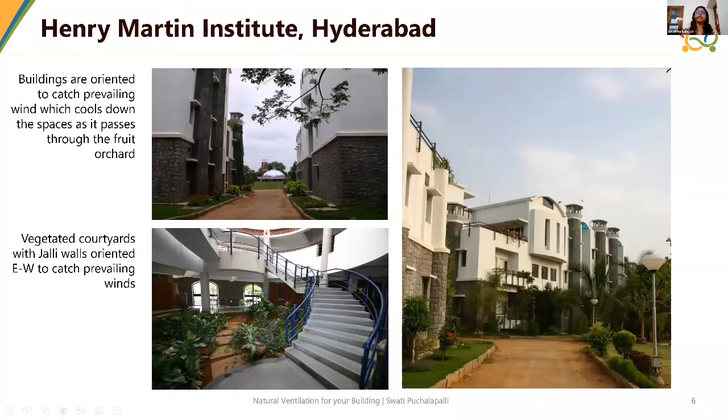They also mentioned that they had tried to integrate PDEC, or passive downdraft evaporative cooling system, but that wasn't really working well. They wished they had used more simulation to get the design right. They had a lot of design principles on natural ventilation integrated here, and integrated in such a way that the design works very effectively.

What you see on the right side are secure ventilators. Most often we think about natural ventilation only during occupied times, but they also made sure it was working at night, when everything was closed down, so the building was able to cool down at night. So this is a little bit about Henry Martin Institute.

It works extremely well. The most interesting aspect of this building is that it was designed around the same time as another very famous, well-known green building in the same location, Hyderabad. While that one cost 5,000 rupees a square foot to build, this cost 500 rupees a square foot. This worked completely on natural ventilation, whereas that did not as much. That other building also had a lot of imported materials, whereas this one was completely built with local materials and local artisans.

So there you go - there is an extremely good example of natural ventilation where it really works. If you get a chance, if you're in Hyderabad, I would recommend that you go and visit this place.

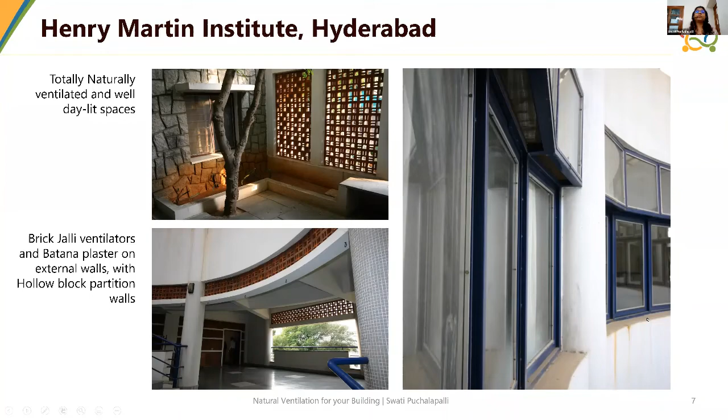Another case study I'd like to show is a rather unsuccessful case of natural ventilation. It was designed to be a naturally ventilated building, and we were brought on board about 4 years after it was built, because the children, since it was a school, were having a lot of heat stress. They found it extremely uncomfortable during summers when the school was operational, and it was also exam time, so they were not able to study effectively. So we went around looking at what was going wrong in this building.

As you can see, the windows seem to be adequately shaded. It seems to be a nice high thermal mass building, with the right kind of jalis and shading devices. So what went wrong and why wasn't it working? When we went and started analyzing it in detail - this was in Hyderabad again, a large 140-acre site - we started looking from the outside.

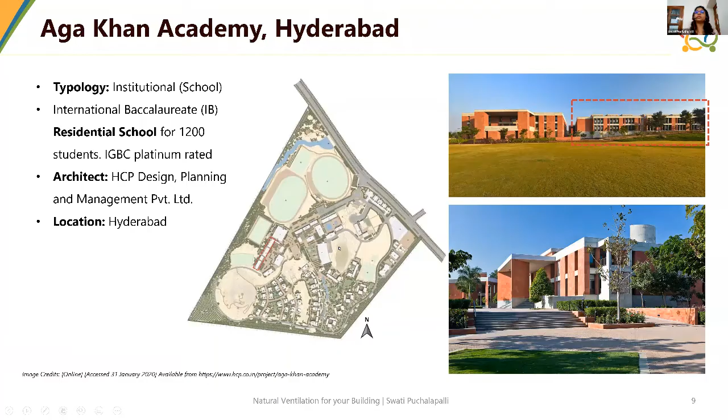What we noticed on the outside is this: when you take a thermal image of the heat of a surface in spaces right outside the classrooms, sometime in May, and when we took radiation images of the various surfaces across the campus where there was direct sun on these hard pavers and external paving, you could see the surface temperatures were close to 20 degrees higher. That was expected.

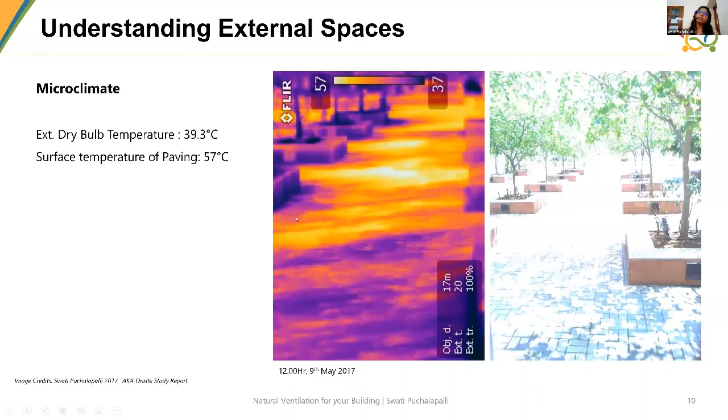But what was interesting was that even after sunset, after the sun had moved away and it was no longer under direct sun, the temperatures were still hovering around 20 degrees higher. External temperatures were around 31 at this time, whereas the surface temperatures were still around 48-50 degrees in some of these courtyards that were exposed through the day. This was noticed across the whole campus.

This basically meant that, as you can see on the right, it was a completely hard-paved campus with not much shading on the hard paved areas. There were green areas, but also hard paved areas, paved with quite dark materials - I think brick actually - and these were picking up heat during the day, and at night releasing that heat, which increased the overall temperature on the site even after sunset. So what this meant for the buildings is that at night, which is when buildings tend to cool down...

In a harsh climate like Hyderabad, nighttime temperatures are lower and buildings usually tend to cool down at night because the temperatures outside are cooler. However, because the external temperatures were not cooling down as much as you would like, the ability for the buildings to release heat stored during the day was reduced. So that added to the discomfort.

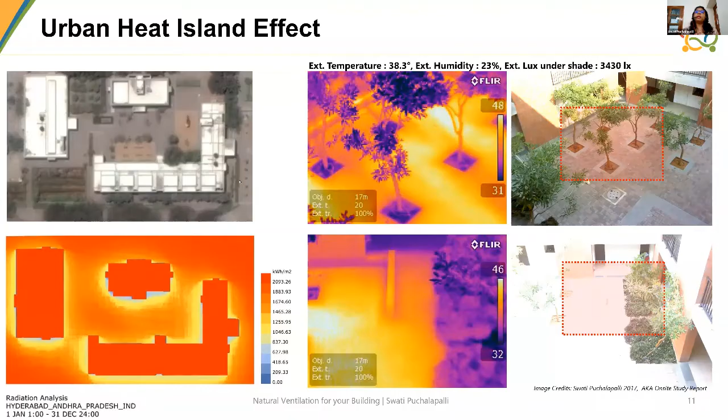Then we went down to looking at exactly where this discomfort was happening and why it was happening. Let us look at these spaces in a lot more detail and start going into the inside of the spaces.

So this is what we were looking at, a set of classrooms. There are two sets of classrooms. One was this set for the senior block. They were oriented northwest and southeast, for catching the prevailing winds, which was perfect, which was really good for both the southeast and northwest winds. These are the monsoon winds, and these are the summer winds. They were oriented right for wind.

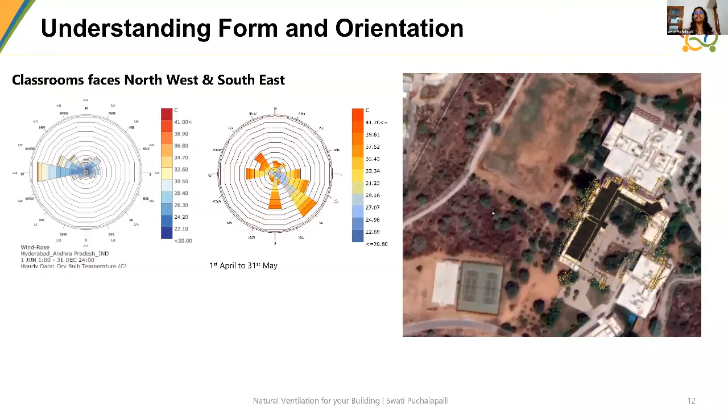However, they were oriented towards the northwest, which had a lot of direct sun. So there was more importance given to the wind orientation than the sun. That could have been countered with some kind of external shading, but that was not there.

So let us go into the classrooms themselves. Here is a typical cross section of a classroom. There is shading on the northwest side, quite a deep overhang, and on the southeast side there is a corridor. On the northwest side, the windows were broken up as you can see in the images here. The bottom was a metal panel, the top was a fritted panel, and the window itself was broken into a fixed pane and a louvered section for natural ventilation.

From an outset, it looks fine. I mean, why not? That seems all right. Seems to be enough ventilation, enough opening for the airflow to happen, because these windows were present on both the northwest and southeast sides of the room.

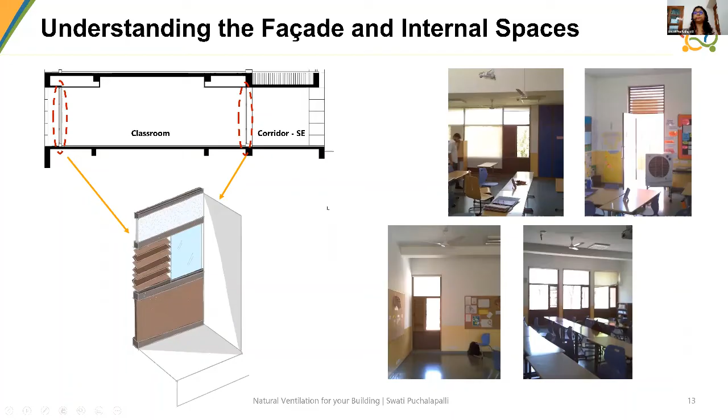However, when we went and took some infrared images and surface temperature images of this classroom, this is what we noticed: the top fixed pane was actually as warm as the metal frame, even though it was glass. That was because of the pinhead security glass with metal wires embedded in it, which was leading to heat ingress from that section.

This was the actual glass section, and as you can notice, the glass itself was not too bad. But the bottom section, the metal spandrel panel, was going up to 55 degrees, especially when the sun hit the panel. Even when the sun didn't hit it, it was still at least 10 to 15 degrees warmer than the walls around it.

Another thing we noticed is that the frame was much warmer, and the louvers also were warmer, and the blinds were drawn. Why were the blinds drawn even though there was shading? It was because there was not adequate shading, so the blinds were drawn, and this cut out any kind of natural ventilation that was possible. The natural ventilation openings were blocked because of the blinds, due to visual comfort issues they were facing.

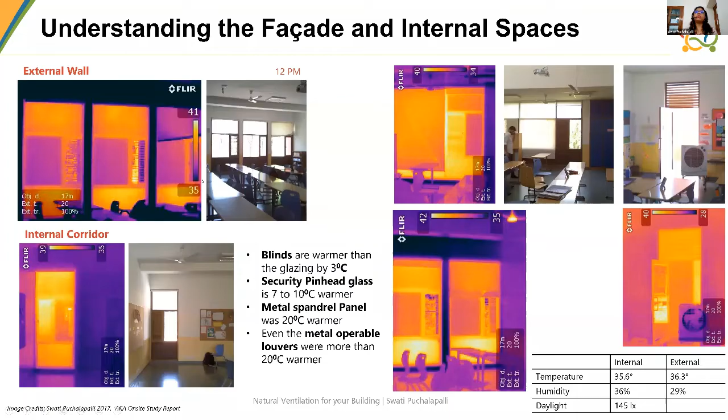Another thing is the temperature and humidity. When the external humidity was at 29%, the internal was going up to 36%, and even more, up to 40-45%. Internal temperatures were okay, around 35, whereas external was 36. So the ambient temperature seemed all right, but there was a perceived increase, the felt temperature was much higher than the ambient temperature. Added to that, the humidity levels were going higher, leading to a certain amount of discomfort.

So here you go: the fritted panel on top was fixed, and it was also pinhead security glass, so it was working as a radiator, increasing the radiant temperature in the space.

The louvered openings were open, but because of insufficient shading, the blinds were drawn and blocked. The louvered openings were also metal, which picked up heat, so the incoming breezes picked up heat from the louvers as they entered the classrooms. The lower metal panel was acting as a radiator, especially when the sun hit it.

There was a stratification layer - warm air rises, and there was no way for the warm air to escape. So when the ceiling fans were turned on, the discomfort in the classrooms actually went higher.

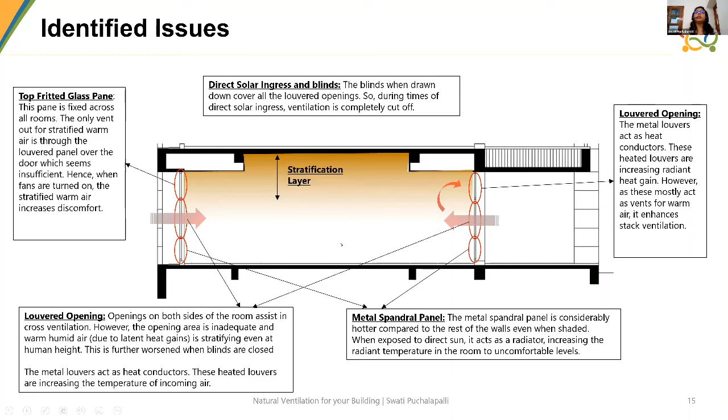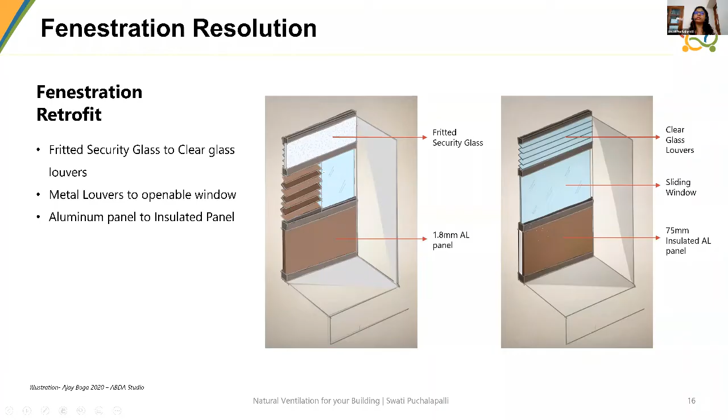So what was the solution? There were several things done. First was to change the type of windows - change to clear glass, remove the pinhead glass, and put in glass louvers. Sliding windows instead of these kinds of windows, and an insulated panel was integrated.

External shading was integrated. So when we did all this, we went back and took measurements in various classrooms. The mock-ups were done in just 2 classrooms, and the rest of the classrooms were available to take as a baseline condition.

So again the following May, when we went and measured the same way, what was interesting to see is that with the window modification and external shading, the temperatures dropped by 2 to 4 degrees, depending on the outdoor temperature conditions. This brought it down into the comfort range through most of the day.

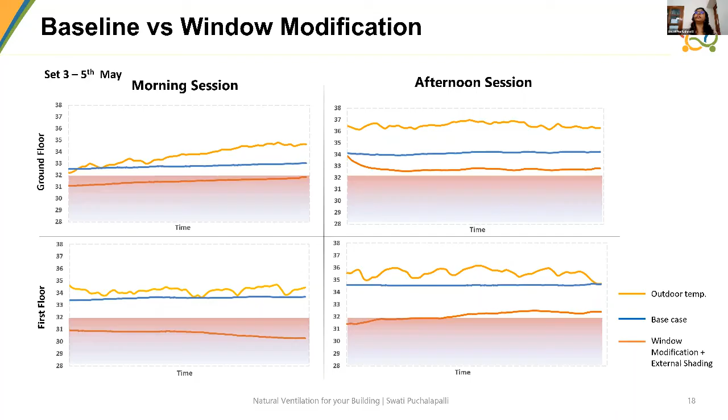So the reason I'm showing this is to show that you can learn a lot from something that doesn't work. You can learn a lot more by trying to analyze what didn't work, and learning from what went wrong. Retrofitting this and getting these measurements helped us understand a lot about all the various things that impact natural ventilation in any design.

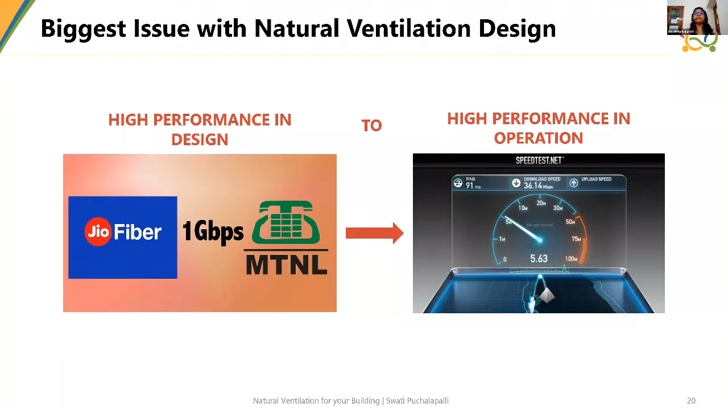So the difference between the two cases is this: the biggest issue with any natural ventilation design or high performance design is that a high performance design doesn't always result in high performance operation. Why doesn't that happen, and how can you make that happen? Especially in a naturally ventilated space, the crux of the issue is ensuring that you design with comfort as your primary objective. Think about comfort first, and everything else will fall in place.

So when I talk about comfort, I'm not talking just about temperature. I'm also talking about visual comfort. If there is direct sun, you're not able to avoid it, so you'll pull down the blinds and the natural ventilation from open windows gets cut off. If it's too much noise outside, you'll again close the windows. If there's too much smell from outside, again you close the windows. So if any of these things don't work, then your natural ventilation fails.

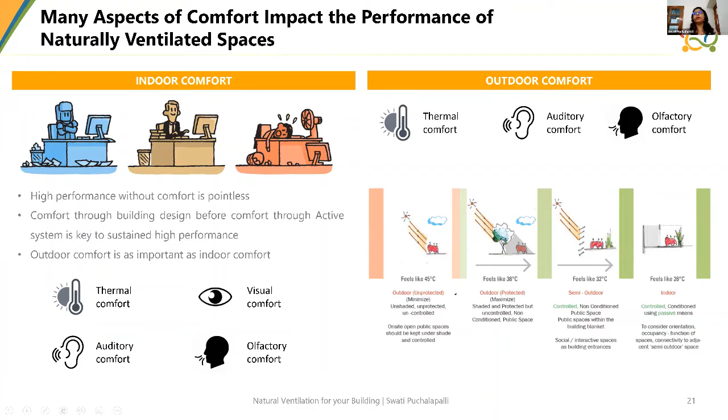Similarly, outdoor comfort is also equally important. So if it's so complicated, you might want to ask - why bother? Why bother with natural ventilation at all?

Then we'll have to go back and understand why certain places feel much better than others. I guess all of you are architects and you know that certain places have a much nicer, what we call vibe, than other spaces. If you go down and understand why that is - for centuries, anthropologists have always been telling us that human beings are hardwired to respond to nature. It's the same relationship in architecture that makes people feel good in certain spaces.

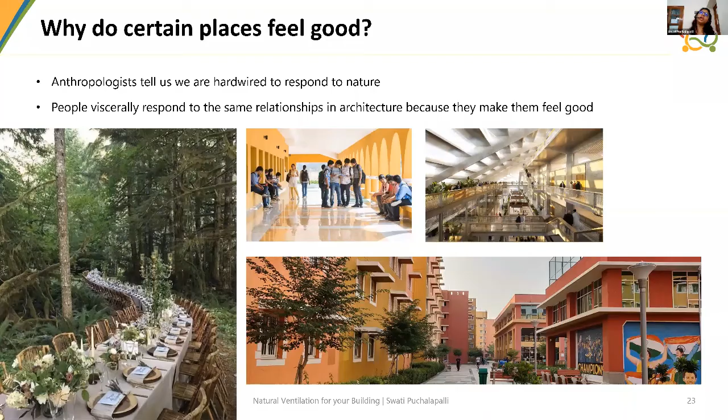So we're all hardwired to be outdoor creatures, hardwired to be in constant touch with nature and outdoor conditions, and that's when we feel much better. There are several studies conducted across the world which found that if you have constant access to natural breezes, natural ventilation, naturally ventilated spaces, good access to daylight, and good views, then your memory span improves, your productivity improves, and even the number of minutes in a day that you sleep also improves.

This increases your ability to focus and enhances the cognitive abilities of people. It also reduces stress, because you sleep better, your stress reduces. Several studies done across parts of the world have said that having this access really helps in improving these outcomes.

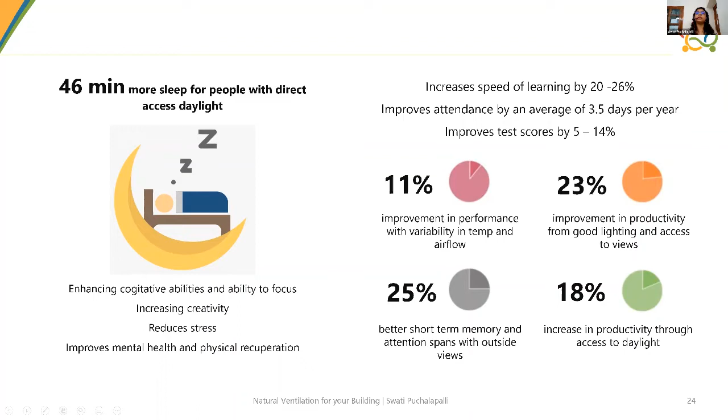Another very important aspect relevant to net zero energy buildings is that if you do a fully air conditioned academic building, your EPI is definitely going to be much higher. With the limited land area available, the on-site renewable energy potential is always limited, so the balance of net zero is very difficult to achieve if you go fully air conditioned.

If you do partly air conditioned, that is mixed mode, some spaces are air conditioned only during summers or the harsh times of the year and naturally ventilated through the other times, and some spaces are fully naturally ventilated, then you have a much higher potential to achieve the net zero target.

Now, if you do a fully naturally ventilated academic building, you have the potential to go net positive energy as well. However, please remember, you cannot do any of this at the cost of comfort, because if you do not meet the comfort requirements later, after design is finished and you're out of the project, the users will usually end up retrofitting the building in the cheapest, quickest, most energy inefficient manner, which will completely defeat the purpose of designing it as a naturally ventilated building.

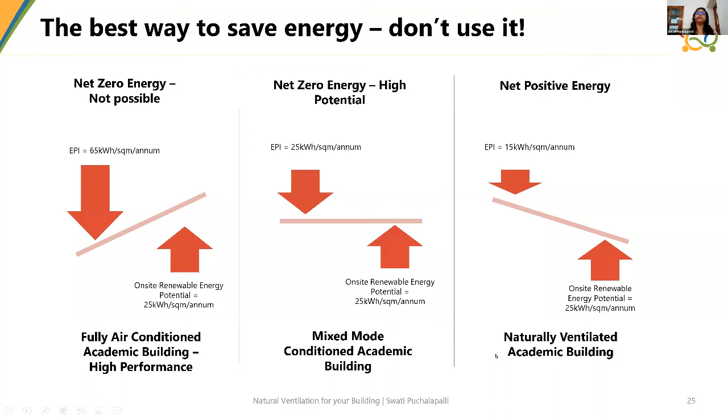So with that, I'd like to quickly go through the various steps and important things you need to consider in the natural ventilation design of buildings. Let's start with the different types of natural ventilation - I'm sure you would have gone through this in your learning modules. There is wind assisted natural ventilation, stack assisted, and night purge ventilation.

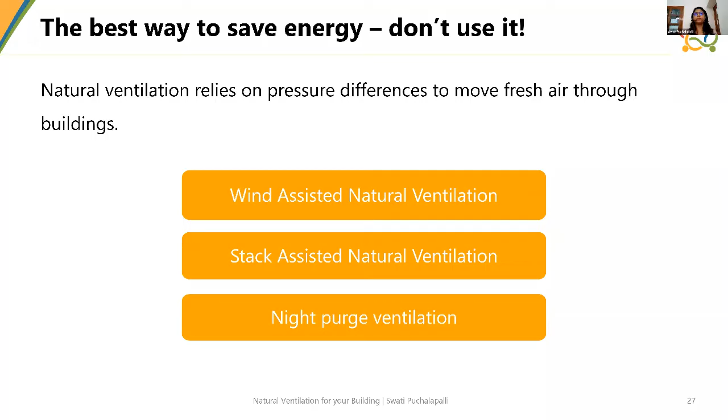Wind assisted is simple, this is something you see most commonly: single sided ventilated space, and cross ventilation. This is single sided ventilation, which is wind assisted, and cross ventilation is when there is movement across the room.

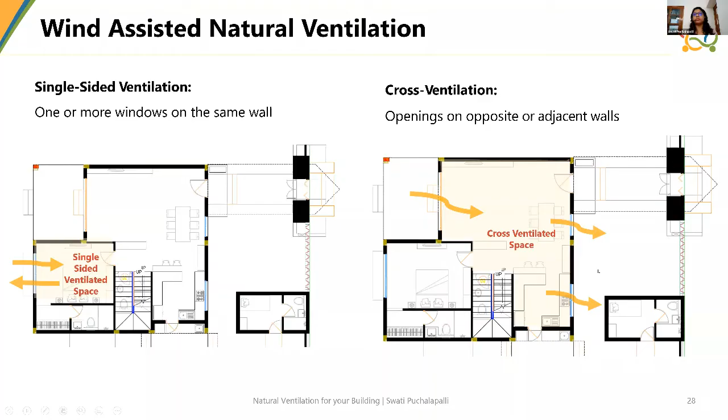There's also a simple buoyancy driven stack. This is when warm air rises up, you provide ventilators at the top, and the warm air rises and escapes through the ventilators. As it escapes, you're pulling in cooler air into the space from the lower areas. This is simple stack driven ventilation, which you see in a lot of older buildings and older houses.

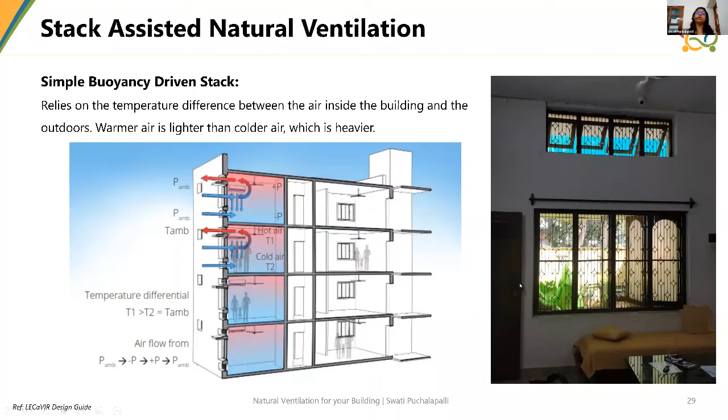Then there is stack assisted ventilation, which is wind assisted - this is enhanced stack ventilation. This is when you create ventilated cavities, these kind of openings, which means that as the wind flows, it creates a negative pressure on the leeward side, pulling in the warmer air from the rooms, enhancing the ventilation capability of these spaces.

The other way to enhance stack is through solar. You create a collector which increases the temperature, and this creates a negative pressure because of the sun or the heat. Then as the air escapes, there's a negative pressure here, and this pulls air in.

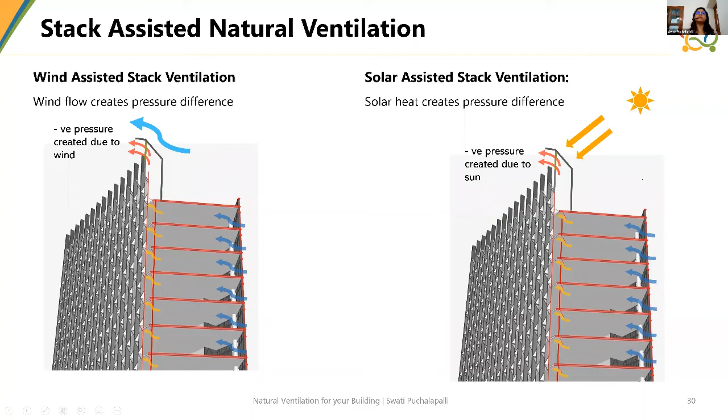So this is a solar assisted stack and wind assisted stack. Some simple examples: wind assisted stack could be wind cowls, or these kind of cowls you see very commonly nowadays - simple stack ventilation. Solar assisted stack would be solar chimneys, which you're coming across a lot. If you do some internet research and look at case studies, you'll see solar assisted stack is being used quite efficiently in a lot of spaces.

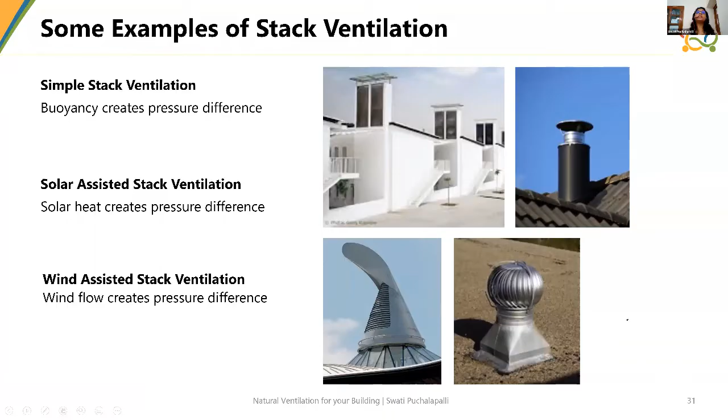If you have a kind of stack, that is a ventilator on top and an inlet at the bottom, then it can go up to 2.5 times. And if you have cross ventilation, it can go up to much more, up to 5 times. The depth of the space can be doubled, and still you can do a good natural ventilation strategy.

A couple of other things you need to be careful about: you should give equal consideration to both inlet and outlet. Ideally, the outlet should be slightly bigger than the inlet, if not at least equal to the inlet.

And if you are looking at cross ventilation through several rooms, like two rooms adjacent to each other, and you're expecting the wind flow to flow through those rooms, then make sure you design the openings between these rooms well. They should be permanent openings.

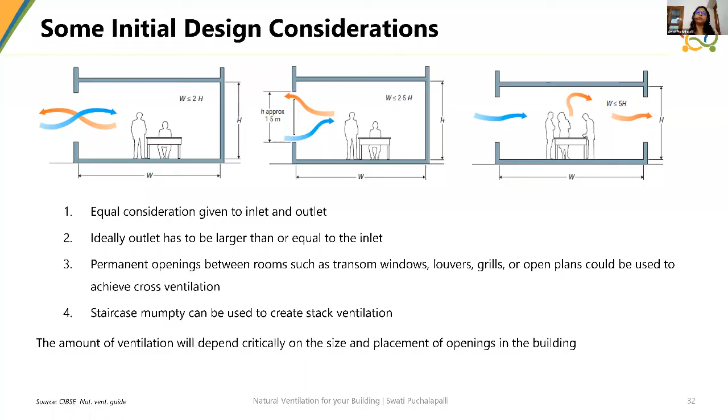For stack ventilation, in a lot of single houses, independent houses, or duplex apartments and similar spaces, you can use the staircase to enhance the stack effect. But most importantly, the amount of ventilation will depend critically on the size and placement of openings in the building.

So that's a little bit on that, and now let's go into a stepwise approach. What do we design for? How do we go about a natural ventilation design? You go in a stepwise manner.

It might look complicated, but it is not, if you look at it based on your personal experiences. I'm sure all of you have experienced natural ventilation spaces. If you go back and understand why some spaces work much better than others, you will start understanding the principles behind those, and how you can integrate the same principles.

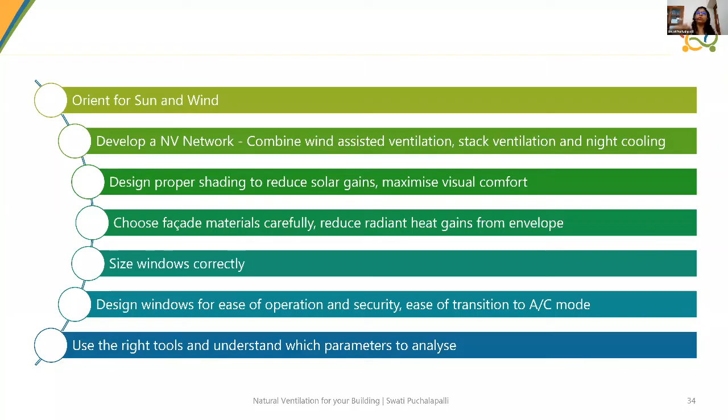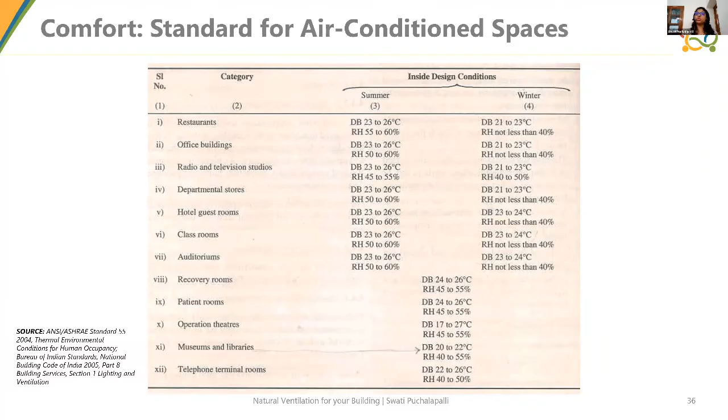So go back and understand that. Now we go stepwise into different aspects of natural ventilation design. But before we go stepwise, I know you've been through climate analysis and comfort, but there are some aspects of climate and comfort I'd like you to give special attention to. Do not consider comfort in natural ventilation spaces to be similar to comfort in air-conditioned spaces. The same design conditions you consider for air-conditioned spaces do not apply for naturally ventilated spaces.

You do have to go in for IMAC or NBC, ideally IMAC, the Indian comfort standards for mixed mode and naturally ventilated spaces. That's the comfort standard you would have to follow. That will allow you to see that natural ventilation is possible a lot more than you think. But the moment you take the conditions of an air-conditioned space and limit yourself to those air-conditioned comfort limits, you are losing a lot of potential there.

But while you do that, you also understand that comfort is not about temperature and humidity alone. Comfort, especially in natural ventilation spaces and passively designed spaces, is a combination of temperature, humidity, airspeed, and radiant temperature as well. Because airspeed has a large impact, you also can't overestimate the potential of natural ventilation spaces, saying you'll increase the fan and keep it at 5. It might not be comfortable for a lot of people.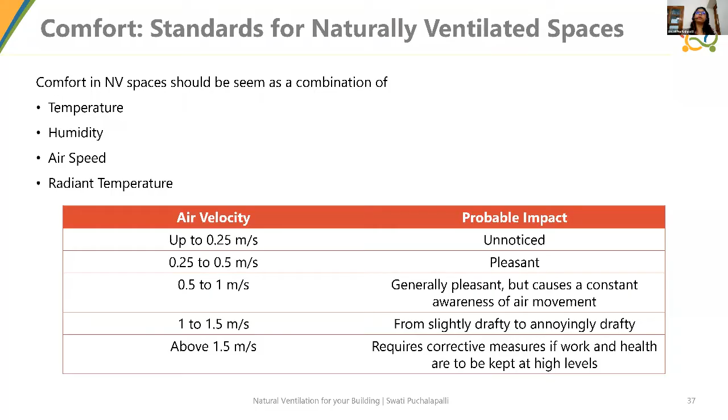More than 1.5 meters per second might not be comfortable. You might feel that it is very drafty. It also leads to a certain amount of background noise, which a lot of people will not like. So do not overestimate; be very aware of at what level air velocity is comfortable.

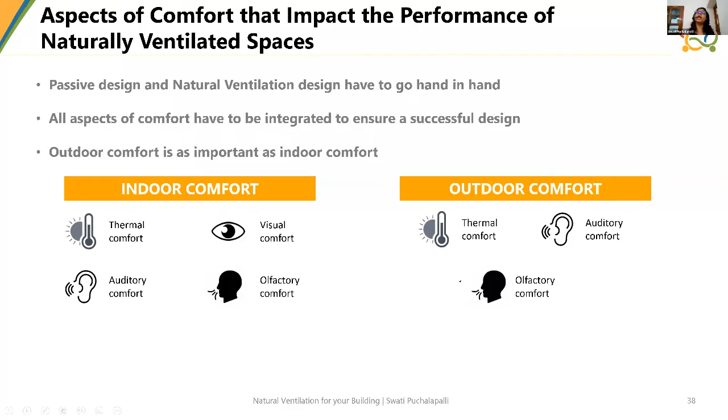And most importantly, passive design and natural ventilation design have to go hand in hand, and all aspects of comfort have to be integrated into design so that your design becomes more successful. So when I mean all aspects of comfort, I mean thermal, visual, auditory, and olfactory, similarly for external spaces as well.

So let's look at understanding what kind of building typology you want to design for, and then split the building based on what kind of spaces can be conditioned in what way. There might be spaces which need to be fully air conditioned, spaces where mixed mode conditions are applicable, and spaces where natural ventilation is possible.

So if you split it up, you can see what kind of strategies you need to apply for different kinds of spaces. Then coming into climate, what are the aspects? All of you would have seen this before in the webinar on climate, and in your learning modules about climate analysis, temperature, humidity, and how it compares with comfort conditions. But what do you infer out of it that will help you in your design? Let's see what you can infer.

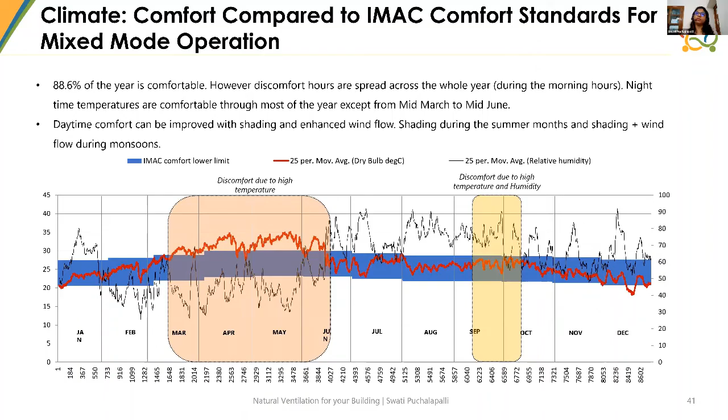If you put it side by side with the radiation plots in the same weather condition, along with temperature, humidity, and the temperature difference between night and day, you'll be able to understand that there are times of the year when natural ventilation works very well because the climate is conducive. Outdoor conditions are very suitable, and that's when both wind assisted ventilation and night ventilation work.

If you go into the monsoon times, you'll see that only cross ventilation works best, and night ventilation might not work that well because nighttime temperatures are much higher, and the difference between day and night is not too much. So if you go through all this, you will understand how to analyze the climate.

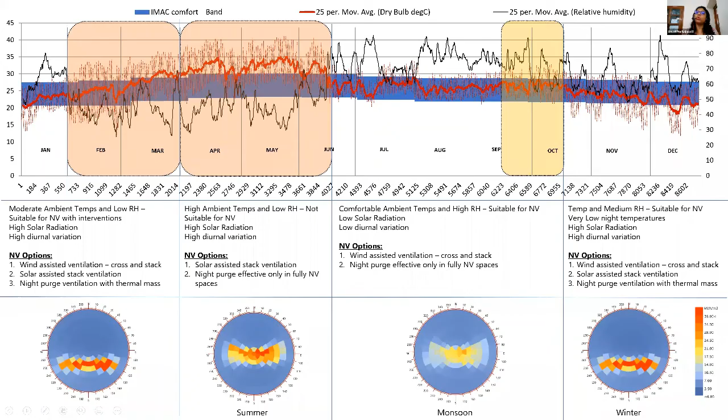Then you can zoom in onto the time of year and wind direction you want to work with. Natural ventilation can be done effectively during monsoons and winters in this case. Of these two, because they're different wind directions, which one will you choose? Monsoons have higher humidity, and this is where only wind assisted stack or wind assisted ventilation works, while solar assisted stack doesn't. So you choose monsoons and design for monsoons.

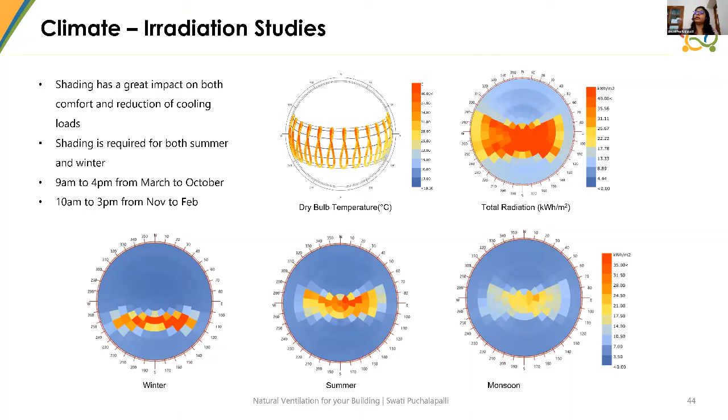The reason we have to go back and look at irradiation is to understand how much shading is required. This again goes back to thermal comfort and reduction of radiant temperature in your spaces. So you go back and strategize what kind of strategies to use for which spaces.

So now let's go step by step, and I'll run you through some simulation results and how those results helped in informing design in the design process.

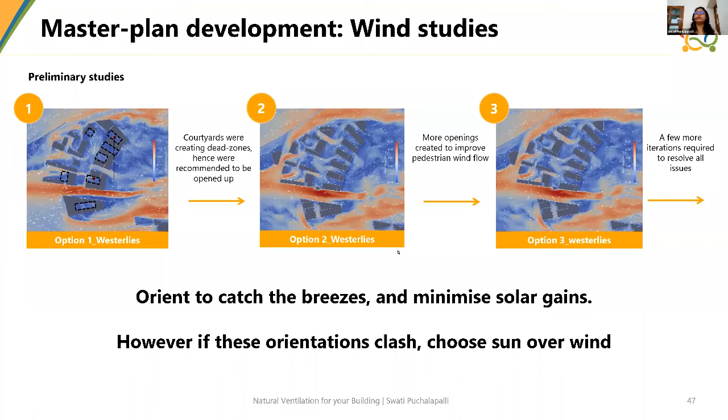Start with orienting for sun and wind. If you have the potential to work at a master plan level where you can design the blocks, ensure the wind flow is comfortable externally, and every block has a positive and negative pressure on either side. This helps maximize the natural ventilation potential in those blocks. However, if there is a clash between orienting for sun and orienting for wind, always orient to minimize solar gains, because the sun is definitely a much harsher element.

Then you go to the next stage of going into the building itself, and you start working on a natural ventilation network. So how do you do it? I'm going to run through this with a case study.

This is a case study of an apartment block, again in Hyderabad, where there were apartments with gaps between them. Every apartment block had breezeways in between, allowing for ventilation from three sides. This helped in one way, and then you start integrating and doing a network diagram.

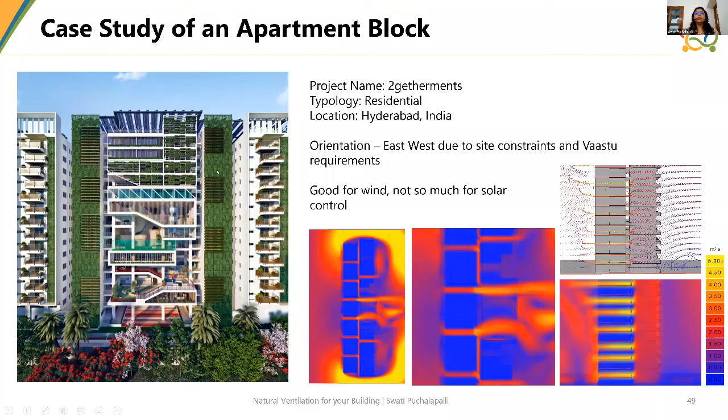How do you integrate stack into this whole equation? Try and integrate ventilators, allow for buoyancy driven ventilation by integrating ventilators in all these spaces.

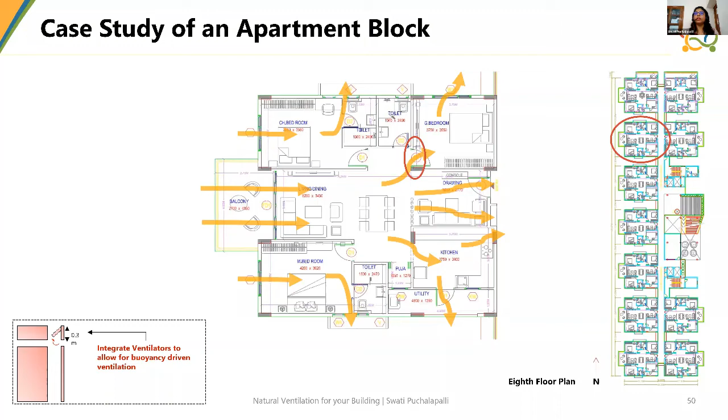This is an example of a building where the orientation is not conducive for sun, but it is conducive for wind, because it was westerly and the winds were westerly. So what do you do? You have to go and ensure that your solar gains are minimized and proper shading is provided.

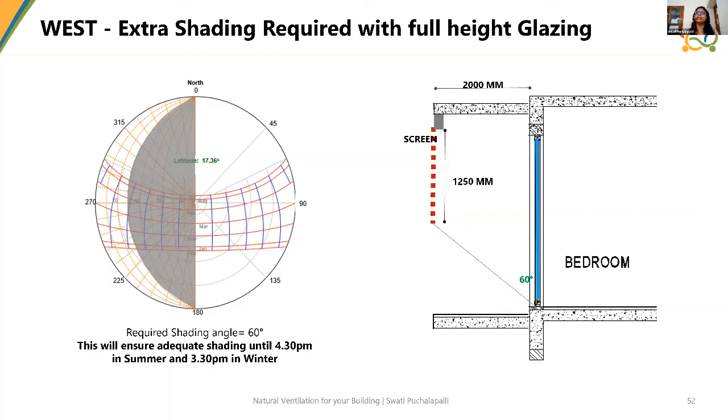So you go around doing a proper shading analysis and understanding what kind of shading is required. Different types of shading devices could be attributed. If you want a full height window, you need greater shading. If you provide a sill, you can reduce the shading. You can have a balcony and provide a much smaller screen. Or if you do not want a balcony, this kind of shading is also possible. The client went ahead with this kind of shading where he integrated these things.

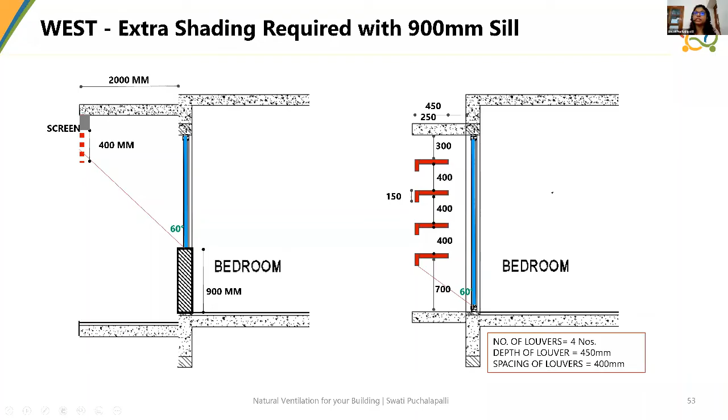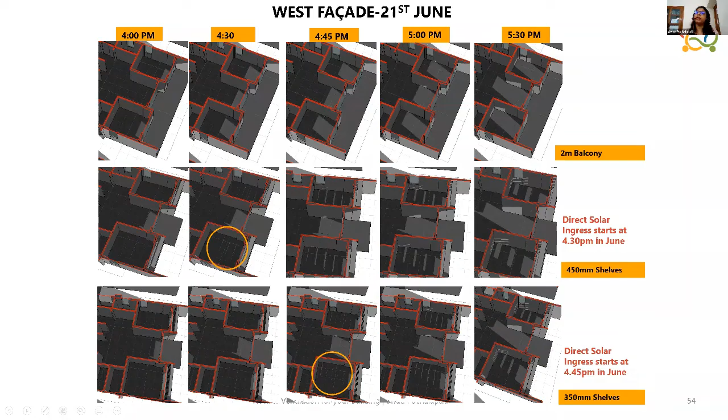Now go around and understand how effective this shading is. When does solar ingress start? You can assume the moment there is direct sun coming into that space, the blinds will be pulled down if it is still quite warm outside. In June, there's ingress only from 4:30 p.m. onwards, which is okay. In December, you should be very careful about when the blinds will start being pulled down, because December is the time when natural ventilation is most effective and can be used most effectively, since external conditions are good.

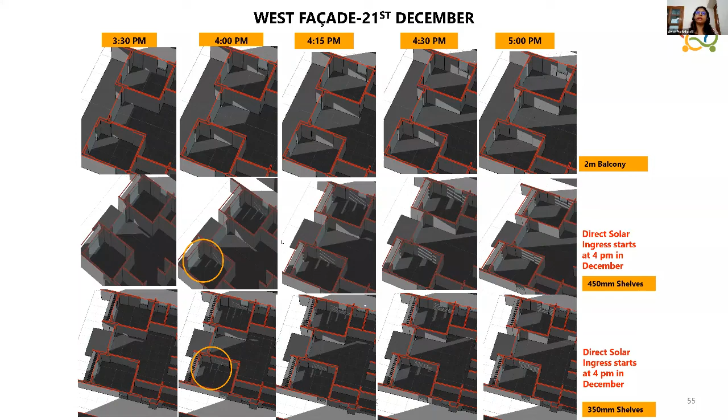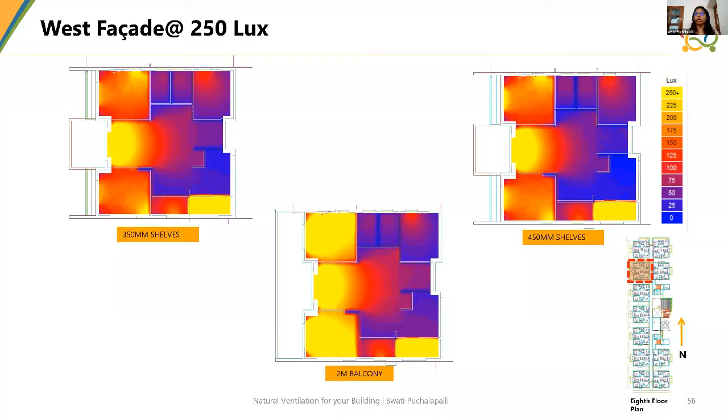So you need to look not only at June, but also at the cooler season, because that's when natural ventilation is most used. Then check the visual comfort - if it's just a balcony, you can see the amount of direct sun coming in makes daylight levels very high. If you start providing shading devices and modulating it, the visual comfort and daylight levels in those rooms become a lot more modulated and comfortable, which means there's a higher potential for people to keep their windows open with no blinds drawn. That's the final objective.

Then go into the facade materials. Choose your facade materials carefully. This is from a different project, based out of Baroda. There were different types of walls being tested. They wanted to go for the lightweight Mivan walls, which are precast, prefab walls that are being promoted nowadays very commonly. So what happens when you use such kind of walls?

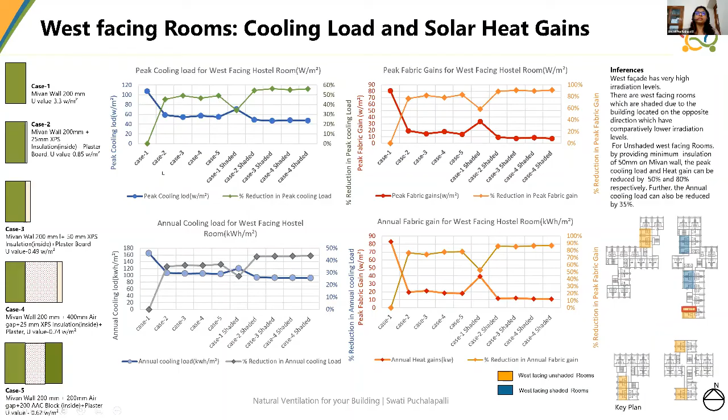Of course, the cooling energy was going quite high in those kinds of walls. When you start providing even a little bit of insulation, the cooling load was reducing by close to 50% in such spaces. But most importantly, the internal comfort conditions with just the Mivan wall - a single 200mm concrete wall with a U value of 3.3 watts per meter square.

When you compare it with another wall, even with a small amount of insulation or some form of solar control, a better or much lower U value meant that in the afternoon, for this hostel at a university in Baroda, when people started coming in at 6 o'clock in the evening, the Mivan wall had a resultant temperature of close to 35 degrees, whereas all other wall typologies brought it down to 31 or 31.5 degrees. With a much better wall material, it could even be brought down to 30.5 degrees. So there's a good 4-degree difference between different walling systems when people enter those hostel or hotel rooms. This is what I mean by understanding thermal comfort from a radiant temperature perspective.

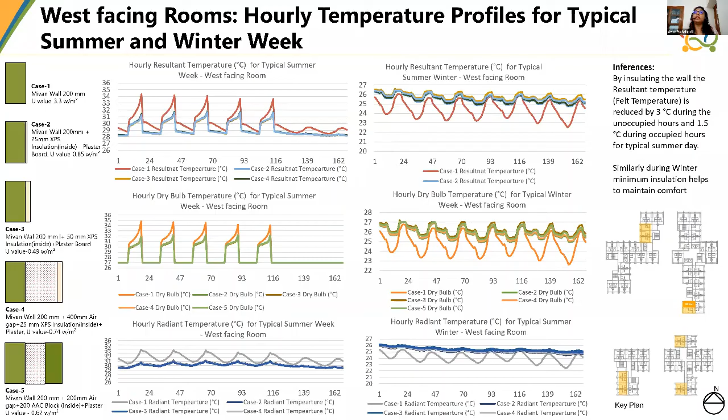Make sure that you do not overlook this, because the amount of heat gain and perceived or felt temperatures in these rooms are going to be so high that whatever amount of natural ventilation you provide would not be sufficient to make you feel comfortable enough.

Once you go through those, then come to the window design. It's very important. The fenestration design is probably the most important part, after which you provide adequate shading. How do you do it? You can start off with the information that you get from the LECaVIR Design Guide. It's a very good guide, something that you can base it on.

However, what you need to be extremely careful about at this point is understanding the difference between the actual window opening size and an effective opening size. What this gives is the free area of the openings, which is not the actual window opening size but the effective window opening size. Please be very careful about that.

Understand that depending on the type of shutter you choose, if it's a sliding window, only 50% of the window will be open at any point of time. If it is a casement window, there is a frame component to consider, and only about 80-90% of the window can be left open. If there are louvers integrated into a window, the actual effective or free area is about 60% of the actual window area. So be very careful about how you calculate it, and the details are provided in these guides, both the CEPT guide and the LECaVIR guide.

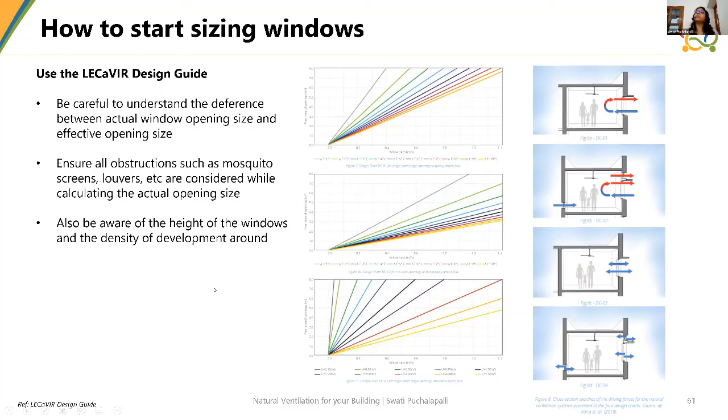In Indian scenarios, or in any tropical country, any naturally ventilated space will require you to put in a mosquito screen or an insect screen. You have to consider that in your design, because it has a huge impact on the pressure drop as breezes come in. Even where you're staying, if you have a mosquito screen, remove it and you'll immediately feel a lot more breeze coming in. But the moment you put the mosquito screen back, the amount of breeze reduces dramatically. You should consider that in your design, and also be aware of the height of these windows and the density of development. So here is a bit of understanding you could use while calculating the impact of mosquito screens.

What kind of mosquito screens? If it is a bronze wire screen, a metal screen, or an SS steel mesh, the porosity is much higher. If it is fiberglass mesh, the porosity is lower. And if it is dusty, the porosity goes down even more compared to when it is clean. Do consider this, because it is a required element in every naturally ventilated space.

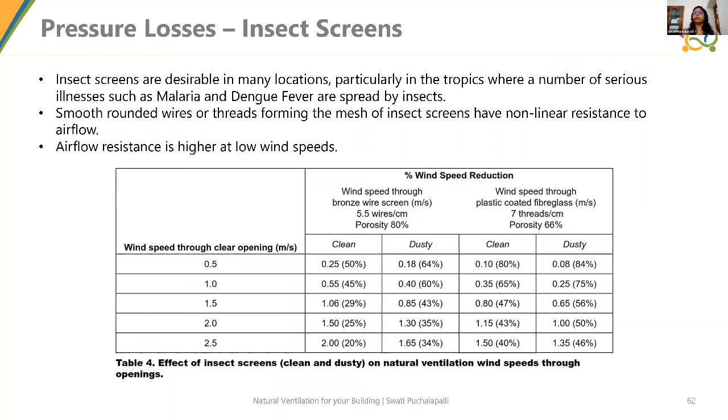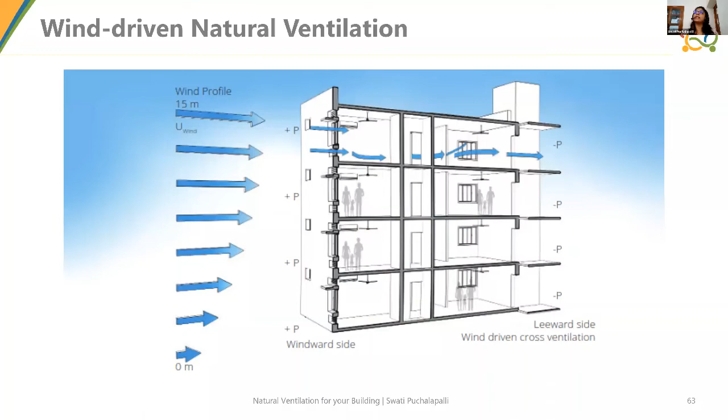Once you use these thumb rules or guides to arrive at your opening sizes, start using your simulation tools to do sensitivity studies and see if they are effective, or if they need to be reduced, or if there's an opportunity to increase them. You cannot go into simulation without a baseline. You need to do a baseline and then simulate, otherwise you'll be doing simulation forever. What takes 3-4 hours if based on a baseline or thumb rule might take half a day without one, and without any baseline at all you might spend 3-4 days to get the same result. So following these thumb rules is very useful and important, especially at the early design stage.

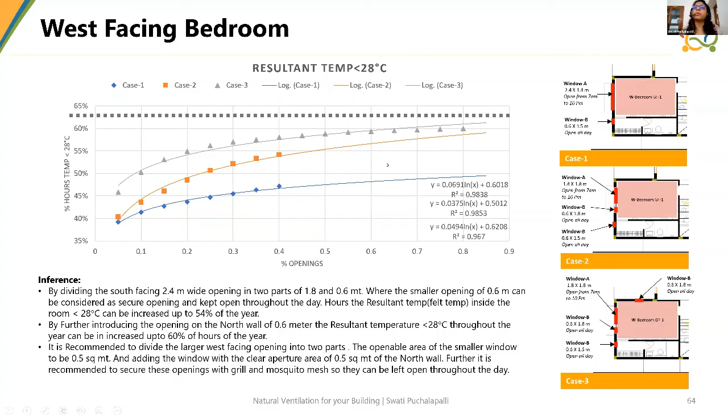In this particular case, there are 3 different types. You can see in case 3 versus case 1. Case 1 is where the windows are open only from a single side, so there is no cross ventilation, and case 3 is where there is cross ventilation. When you do that, the difference between the two is dramatic, and you can see the comfort levels go up quite a bit if you have cross ventilation compared to single-sided ventilation.

Now, coming to the next case, this is about secure windows. We architects love, or a lot of people love, to have these large French windows. But how many people are comfortable keeping those French windows open at night? No one likes grills nowadays, no one is designing for grills. So what happens is, when you're sleeping at night, these windows tend to be closed because they are not secure and people don't feel secure keeping them open. So there's a large impact on comfort, because at night your building is not cooling down and you're completely losing the advantage of night ventilation.

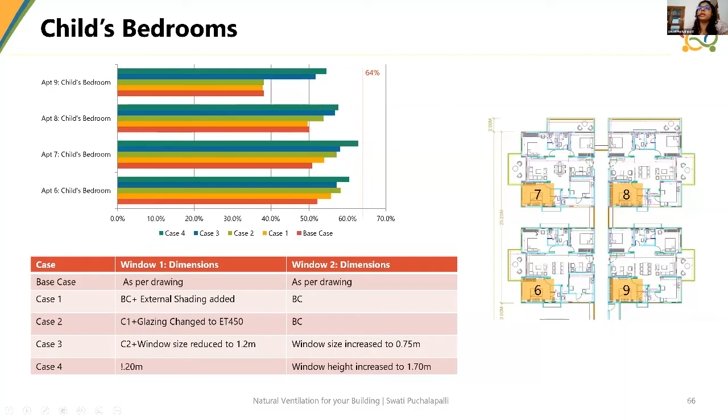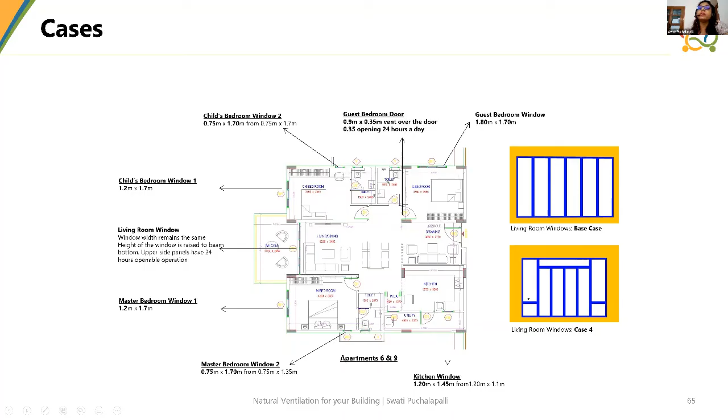Same kind of thing applies specifically in the case of the living room, where you have large open French windows. These end up being closed at night because no one's comfortable keeping them open. The moment you provide more secure openings that can be left open at night with some grill or something, you allow the building to cool down at night, and it drastically improves comfort in these spaces — you're able to increase it from around 47% to around 55%. That's the kind of impact night ventilation has.

So always think about night ventilation. Don't think that if you design a window for the day, when people are occupying the space, that would be sufficient. You have to design for times of the year and times of the day and night when people are not around, when it is closed — you have to design for nighttime, for times when people are not occupying the space. Otherwise, if someone's going on a holiday and you cannot leave your windows open, the heat buildup in the space is so great that it affects the furniture in the house, especially if you're away for a whole summer or a month.

Through the summer the heat buildup is so high that after you come back, it takes time for the building to cool down. So think about those.

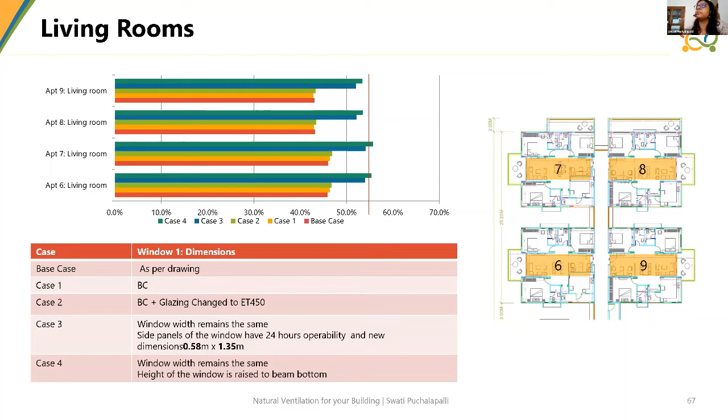Think about times to secure openings at night and holidays when the building is not occupied. So think about this background ventilation as well. It's as important as designing ventilation during the daytime.

Finally, there's a lot you can do using simulation tools, and a lot you can do using thumb rules and standards. However, if you use the right kind of simulation tools, you will be able to test them out. In the earlier days, this ability wasn't possible. This kind of potential of testing a building before it is built was not possible.

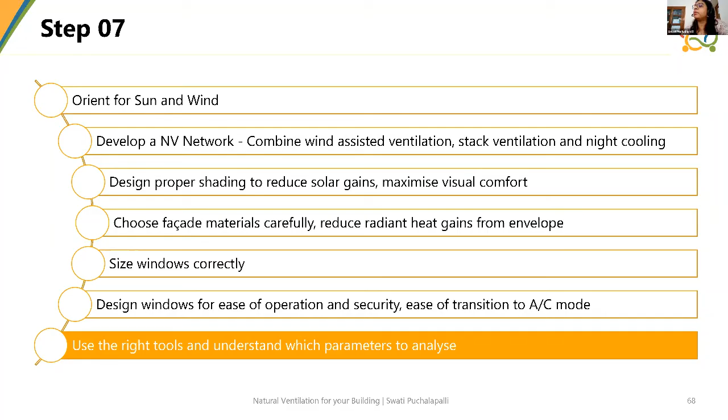So the learning process is very long. You make a mistake on one building, you correct it in the next, that might not be the best case scenario, you correct it in the third. So you're losing a lot, making several mistakes before you get to the level where you're doing it right. Now simulation tools can help you speed up that process.

You can test various scenarios and zero in on one or two strategies that will work. You zero in on the type of windows, the opening proportions of those windows, the size of those windows, the kind of shading devices, the height of these windows. You can do a lot of testing at the simulation stage to ensure that the design strategies you are integrating actually work. However, to do that, you need to use the right tools.

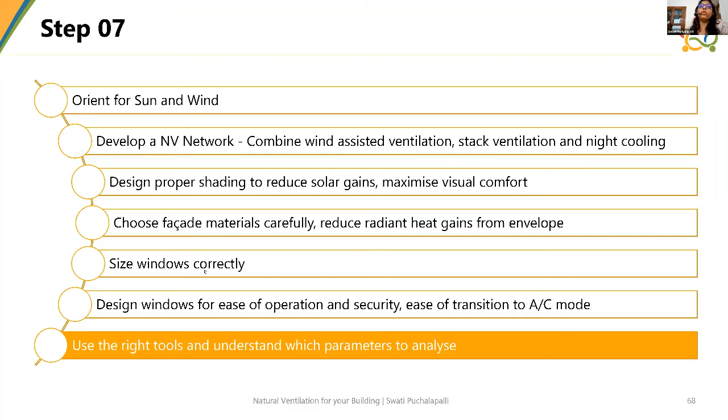But tools are one thing, how you analyze the results that come out of the tools is another very large part of it. So what are the most useful parameters for you to analyze?

One is resultant temperature. It's probably one of the most important design parameters that you can use to analyze various aspects of your design. Then airflow through the rooms - how much airflow, ACH or in meters per second - is another one that you can use to analyze your building.

Further assessment could be how much wind flow through an aperture. Surface temperatures of rooms is a very important aspect for you to understand the resultant temperatures or the thermal comfort in a space, due to radiant temperatures of your external walls or external openings. That's also a very important parameter you could analyze in your thermal analysis.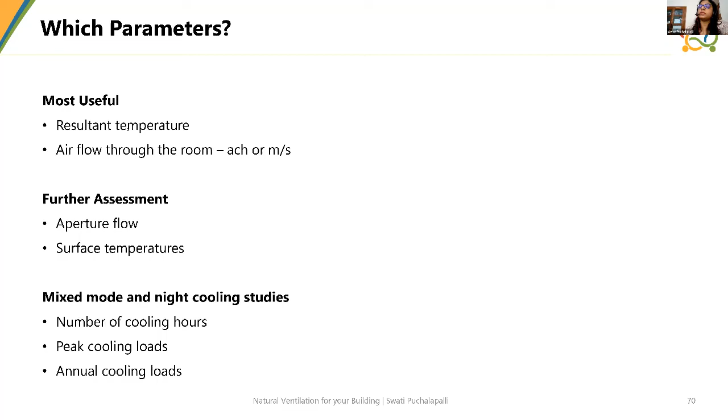And what are the various things you can test out? In mixed mode and night cooling studies, you can look at number of cooling hours, peak cooling loads, annual cooling loads. You can also look at how many hours in a year you can naturally ventilate, how many hours in a year you have to air condition. In a mixed mode space, you'll be able to get that kind of information, but to get that, you need to look at resultant temperature as your primary parameter.

Some are very straightforward, like dust and noise pollution - if there's too much dust and noise pollution, you will have to close your windows and you can't do much. Mosquitoes and flies - yes, you have to design for mosquitoes and flies.

Spiders and spider webs - this is personal experience, partly with ventilator design. If you keep your ventilators opening outwards, the frequency of spider webs forming there is a lot higher compared to when you keep your ventilators opening inside.

Pigeons - it's a common issue we face nowadays in a lot of apartments. If your window sills are not designed correctly, you have pigeons settling on them, and that means you will end up closing your windows because of allergens.

Rain - very, very important. You have to ensure there is a certain amount of rain tightness, and an ability for you to keep your windows open when there is rain. Otherwise, if there's water coming in, no one wants to go about cleaning it.

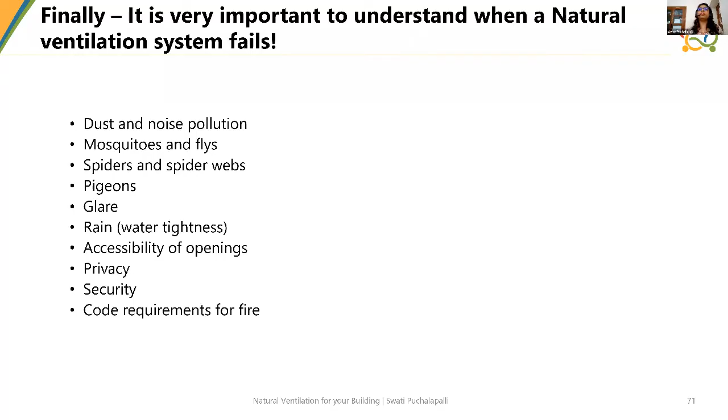With this, I'd like to end my webinar, and any questions you have, I'm happy to answer.